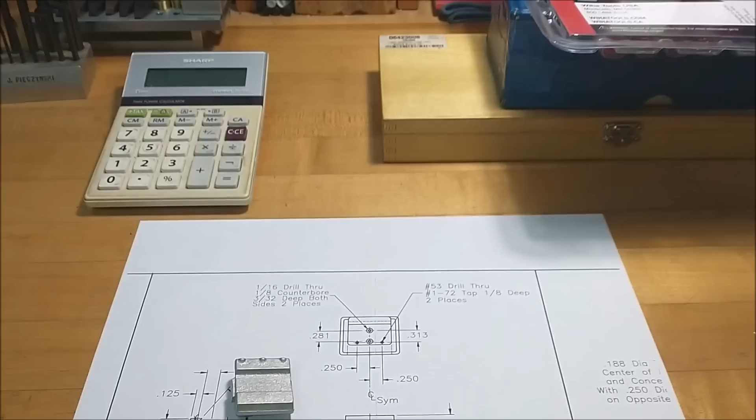After having just recently finished up the knee for the mini milling machine, I'm going to move on to the saddle casting since all my dovetail cutters and blocks and such and desire to cut dovetails is still pretty alert. Anyway, this is what the part looks like when you start.

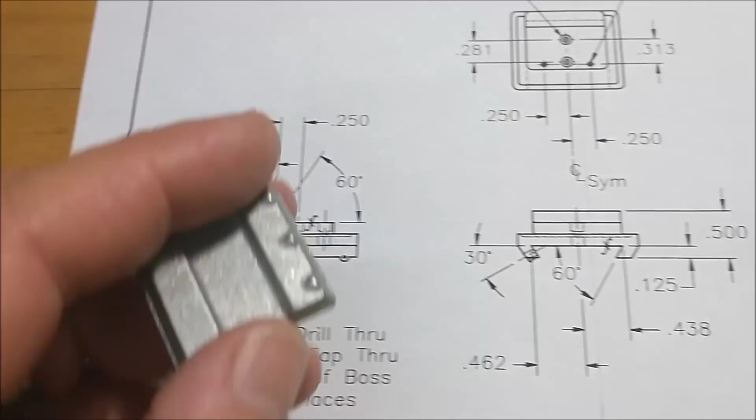A lot of similar features to the knee - basically the same type of offset dovetail for a gib, adjustment screws. On the top here, this is a two-piece dovetail. There's another piece that goes on here that will actually push and close so that you can take up the adjustment for the table itself.

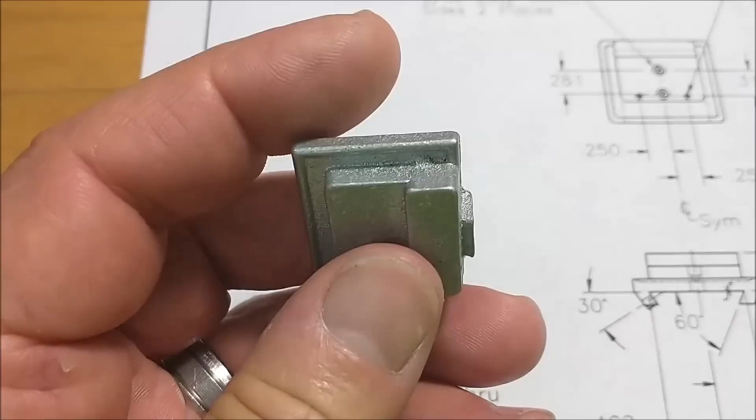Naturally, like anything else, going to start off with a file, create some flat surfaces, blast this thing, and we'll be back and I'll show you what that looks like before we get started. Let's do it.

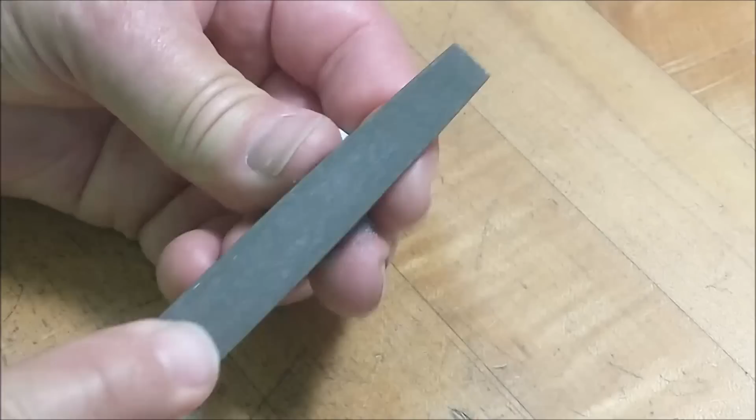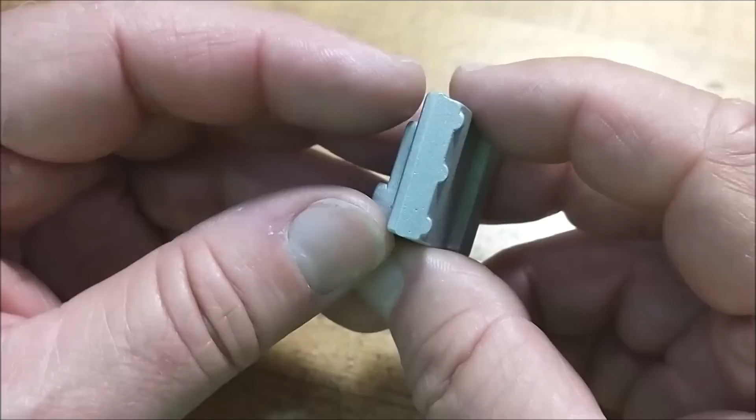After just a minute in the blaster, the freshly filed surfaces are now true to the world, and they look like the original casting. Now, when I produce this part, when I start machining this part, I'm going to use this as a primary banking area right here, and I'm going to hang it from the back jaw to establish

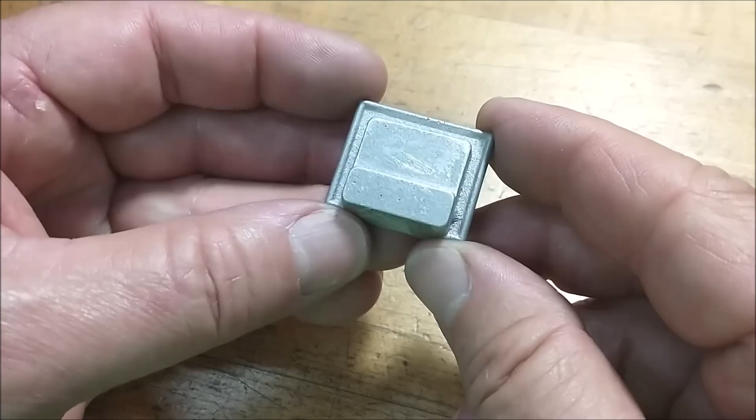May or may not be the right choice, I will find out shortly, but this is ultimately going to be all relieved away for a dovetail cut that will be right here in this corner. But I still need some place to hold it so I can do that, and that's what I'm going to establish. That's the first one.

Let's jig it up, hang it, take a couple of cuts over to the mill.

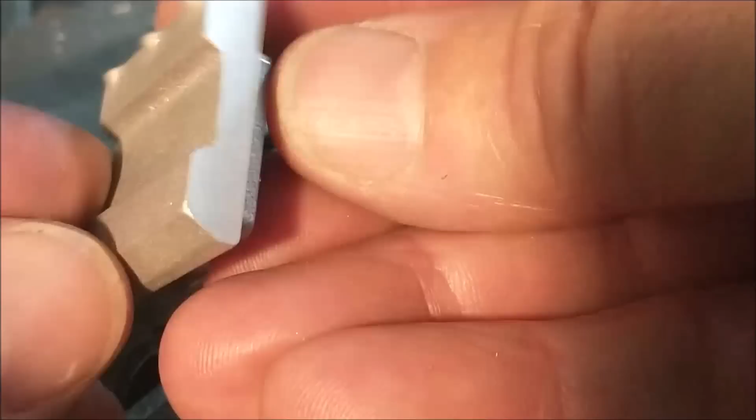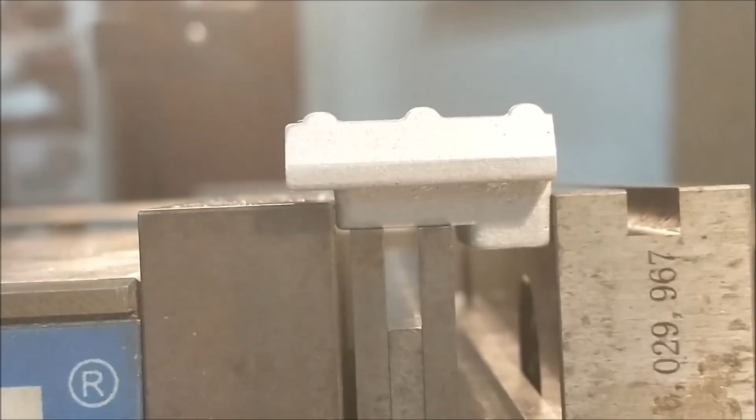By using a variety of parallels spaced at different intervals, I can bank off the surfaces that I've been using all along as datums - machine surface in the back and the contact surface underneath.

I'll be working in the y-axis to do the top dovetail features. And I will move the part over on center. That was just so that you could see the stacking of the parallels.

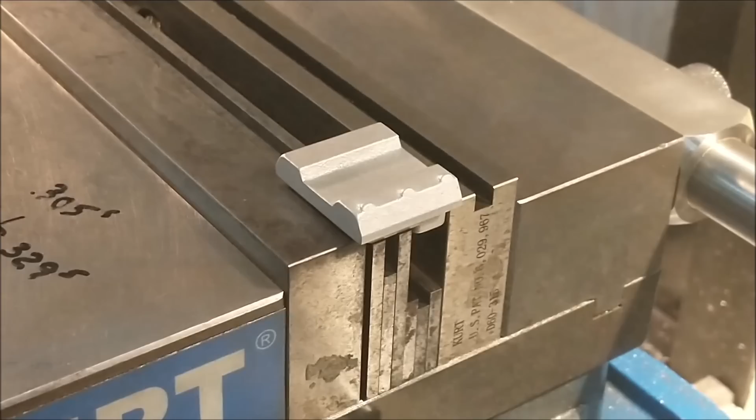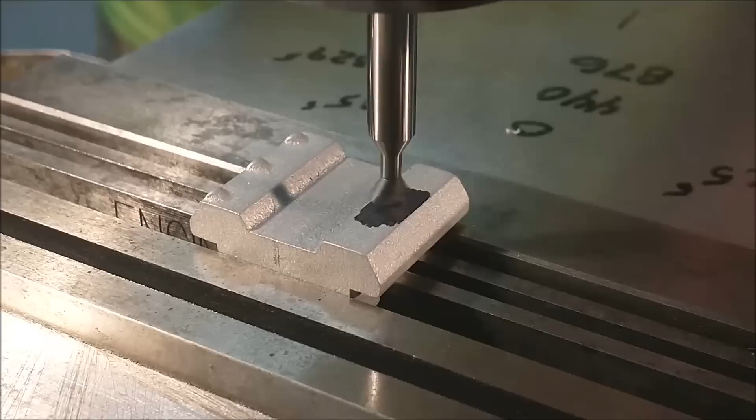If you pay attention to the black spot that I just put on there, when I bring the dovetail cutter down, you'll see an incredibly small witness mark show up on that area. And it is right there.

Now I've set the table to a specific zero, and I'm going to check my gap against this tool with a feeler gauge to make sure everything is good.

Now if you're using a feeler gauge to check a carbide tool or a cutter, make sure you make the table shift and then insert the gauge. Do not bring the cutter down onto the gauge or the pin or the block. You will chip the cutter.

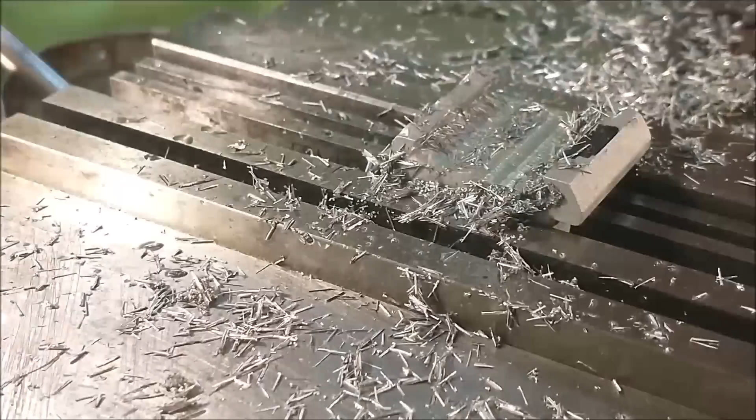Lapse time, 12 minutes for that slide. Take it out, clean it up, reposition it, drill some holes.

Be extremely careful when drilling the holes through this surface. If you have parallels underneath, the holes will probably intersect at least one of the parallels. I managed to squeak mine out. I'm going to do the holes before I move this part.

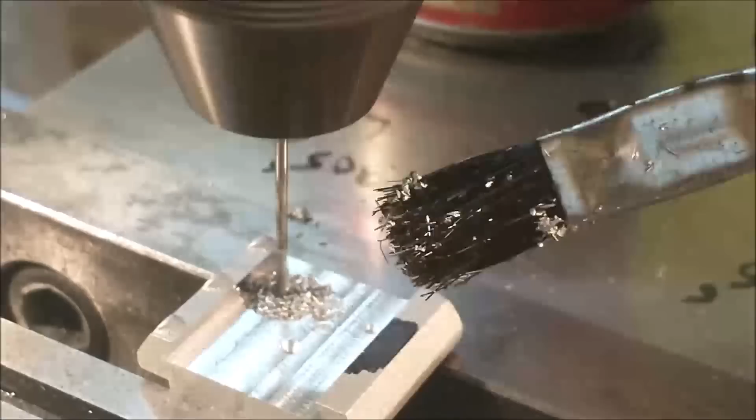I do not usually put an end mill in a drill chuck, but this is a counterbore operation. It's moving about 20 thou worth of material on either side of that hole, and I'm coming straight down with it. There's no side load, so I'm going to say it's okay in this particular situation.

I'm going to bring the quill down to a hard stop, and I'm going to bring the table up until I see material start to gather around the bottom of the cutter. That's why I didn't center drill it too large. I wanted to make sure there was area for the cutter to engage.

At that time, I will zero out my dial, get the cutter off the deck, and move the table up the depth of the desired counterbore.

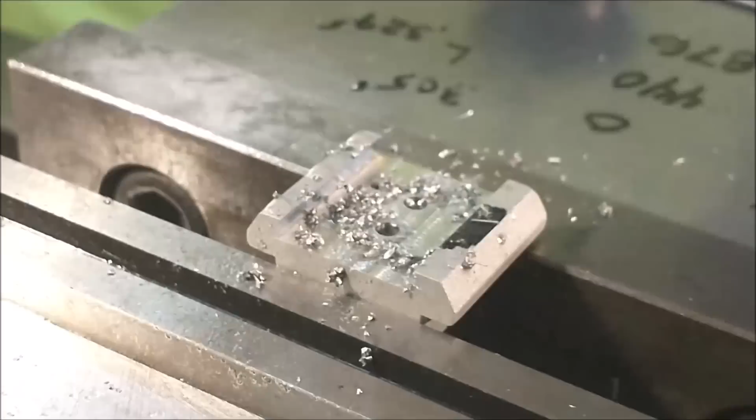Comfortably, I would say the next operation are the 3 oblique holes, very much like you saw me do on the knee.

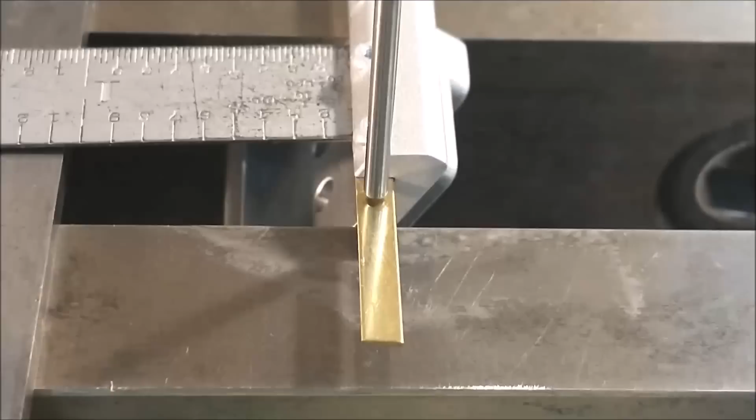Prior to drilling the 3 gib adjustment screw holes, I placed a piece of brass shim stock, the material they provide for the gib, in the dovetail slot. Using a pin and a drill chuck, I visually aligned the pin to a good contact point on the gib so it wasn't biased to the top or bottom. That was then my x-axis zero. Y-axis for the holes was completely visual.

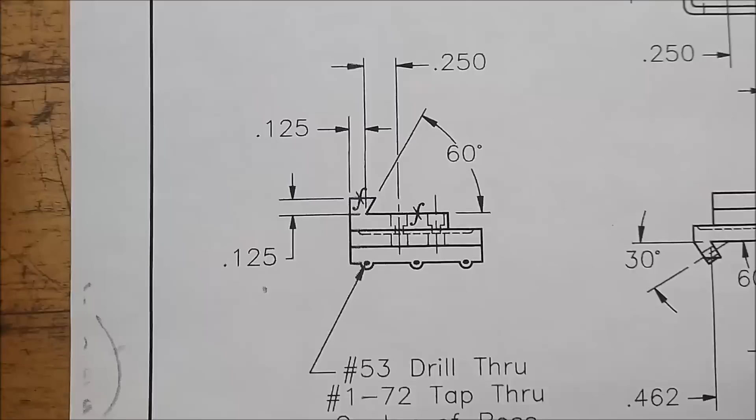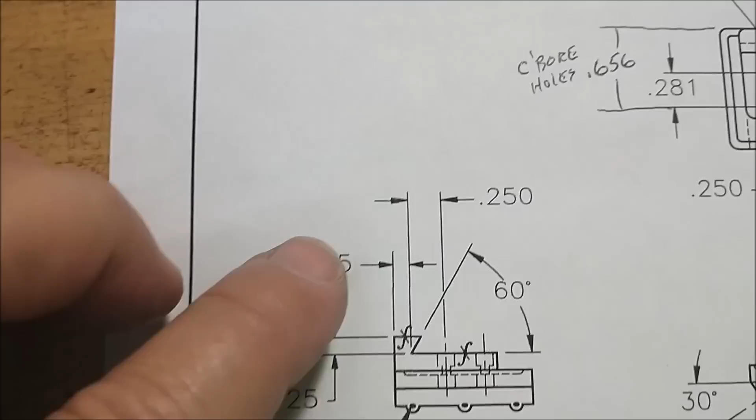The final milled feature on this little part is the top dovetail. Now, I'm not sure who designed this part or why they dimensioned a 3-place decimal to an internal sharp corner, but that's probably not the way to do it. I'm going to lay a pin in there, and I've come up with a stack dimension that I'll measure from the back of the part to the outside of the pin, and I can guarantee that with a correctly sized 60-degree tool, the 125 theoretical sharp corner they're requesting will be there.

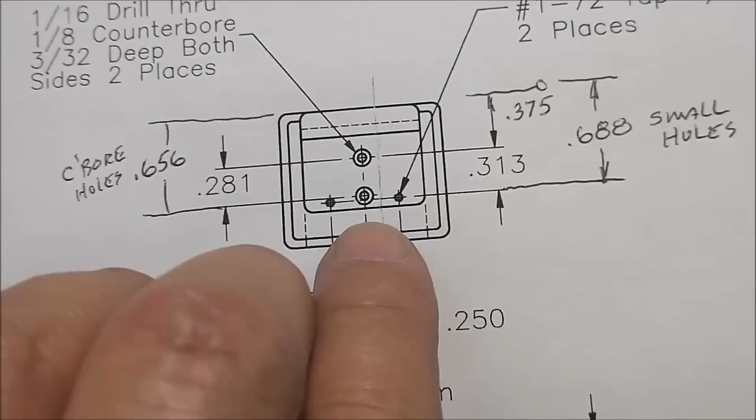I'm going to sit this on a block that rests inside the dovetail area, so I know everything is true. It'll be banked up against the jaws this way with a pinch block on the front, and this should be relatively easy and quick to cut. The holes are already in, so I'll just pick up the holes with a pin, and I'll know exactly where I'm at, and I can come back and put the counterbores and threads in the part. I'll show you the setup.

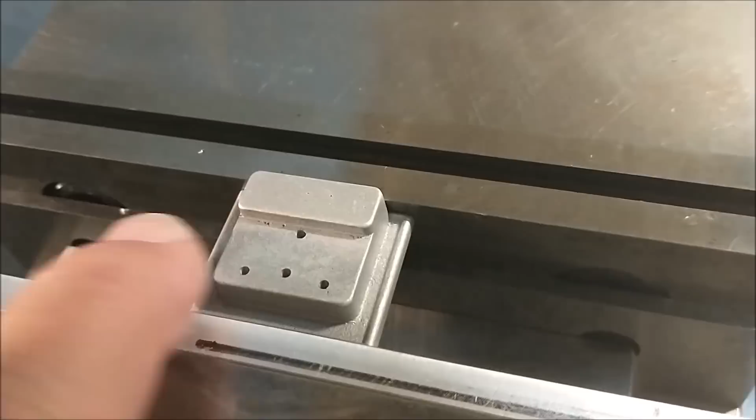Very straightforward. Support block underneath resting on a machined surface. The machined surface from the initial operations is pressed against the back stationary jaw. And I'm going to run the dovetail cutter left to right along the x-axis to put that feature in. Let's do it.

All the redundant steps were edited out for time compression.

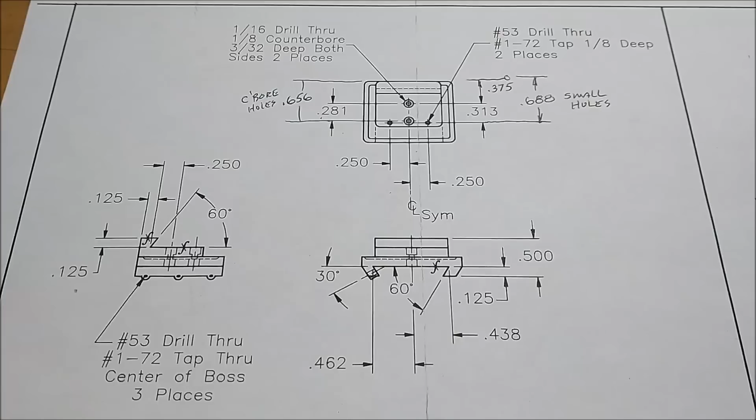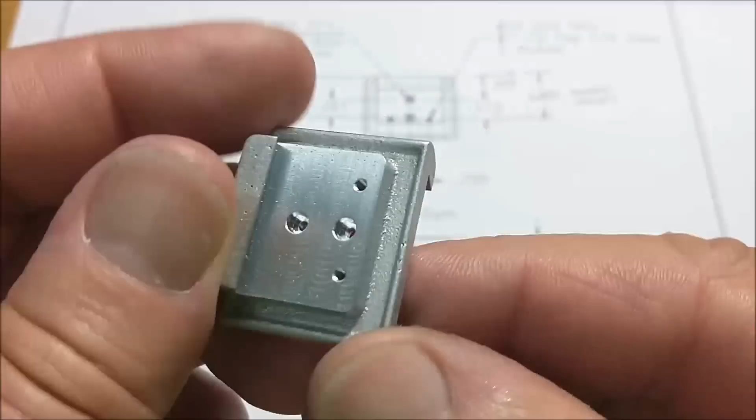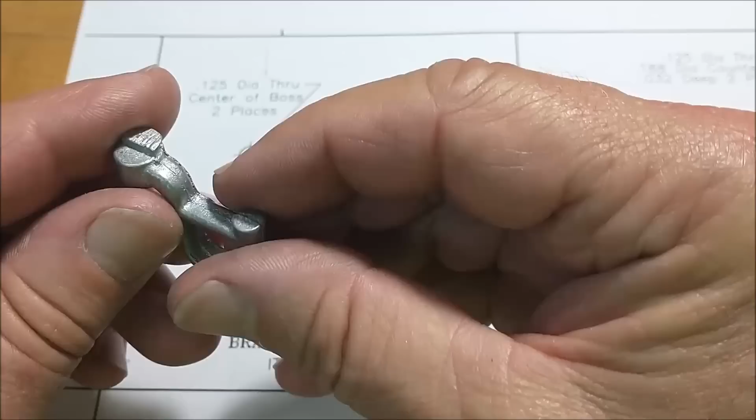I think I'm going to take a break from the dovetails for a couple minutes and do the little bracket casting. This guy shouldn't pose too much of a problem, but there's a rather aggressive mismatch in the casting right here. You can see the thickness of this side versus the thickness of that side. Boy, they missed the ball on that one.

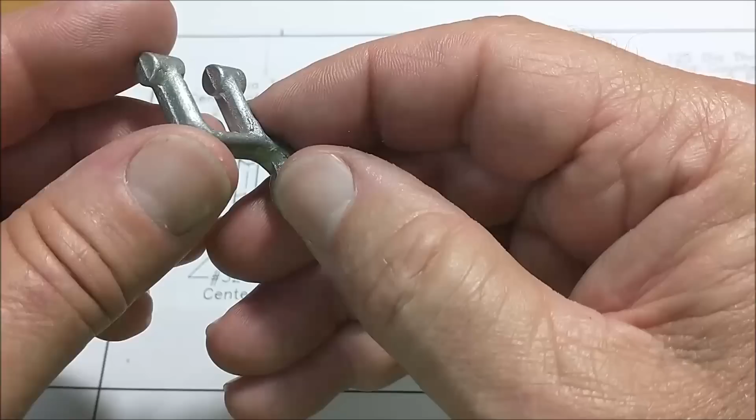Not too bad. It's going to take some filing time. I did some preliminary measurements, and it's the same gauge all the way across, all the way around, so that's good. That gives me a flat clamping option this way, and I can side mill everything and do all these dimensions basically at one shot, then stand it up to drill it. Well, that's the plan. Let's grab a file, some patience, and a cup of coffee, and figure out how we're going to make this thing go away.

I have a feeling it's going to be a corner round tool in the mill right there. That's an awful lot of meat to try to file off and make it look pretty. Give it a shot.

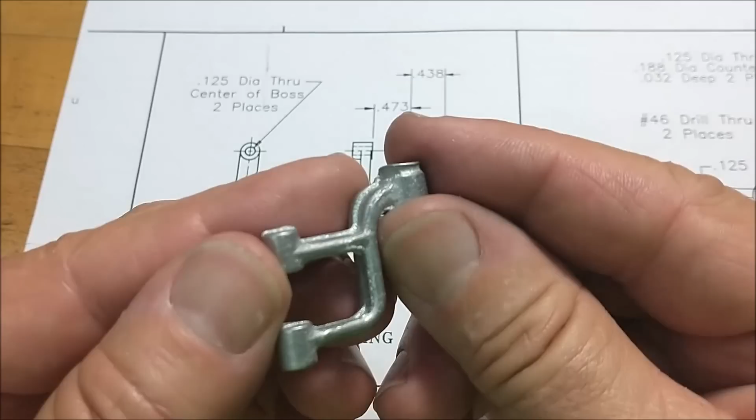The combination of a Sharpie marker, or any type of marker, and a file, I think, is a fantastic aid in visualizing what you're trying to accomplish. The Sharpie marker usually fills in the voids, and the file will instantly show you where those voids are when you start cutting away the black. It works incredibly well. If you haven't tried it, give it a shot.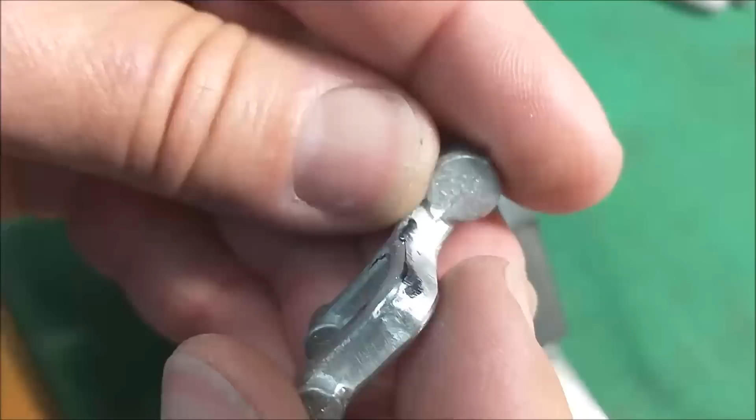Man, that is ugly. Woof. All right, well, more filing. Not going to bore you with it. I'll bring it back and show you when I'm done.

Actually, I'm going to put this back in the machine, and I'm going to mill off this inside. I'll show you that operation. But the rest of the filing, seen it once, seen it a dozen times, right? Just going to round these corners off, blast it. I'll be back. Well, the mismatch on this little piece is just a little too aggressive on the back side of this area right here.

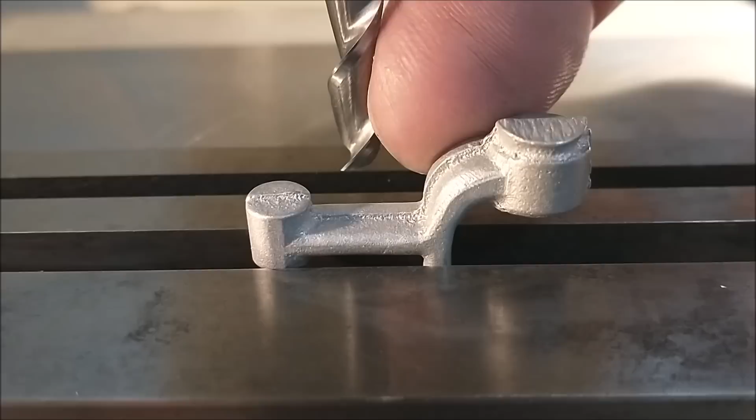It's going to take forever and a day to knock that off of there, so I'm going to do it in the mill. I'm going to mill that out and just rotate the piece a bunch of times to knock this down, then file it in to match, of course.

The arm itself, this little section right here, is just visually positioned parallel with the table. If you look through it from the back, I can't get the camera down there low enough to show you the gap, but it's just a very small parallel gap right there under the casting. All right, so let's put some marker on there and have at it.

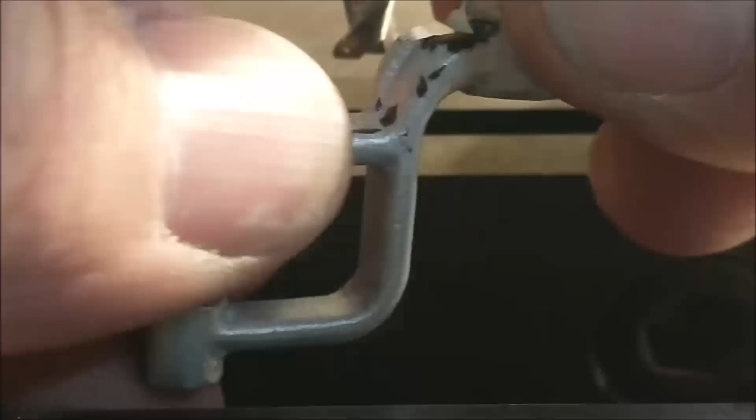Since the nose of the part is wider than the body of the part, spacer blocks are required to rotate the part. Each one of these cuts, I'm trying to form a flat on this part that projects about the same distance into the radius on the far side.

This is all visual right now, and the length of that cut is the determining factor. I could probably go deeper if I wanted a smaller radius on each side, but I'm going to try to keep the big radius on the thicker features so that it looks more authentic.

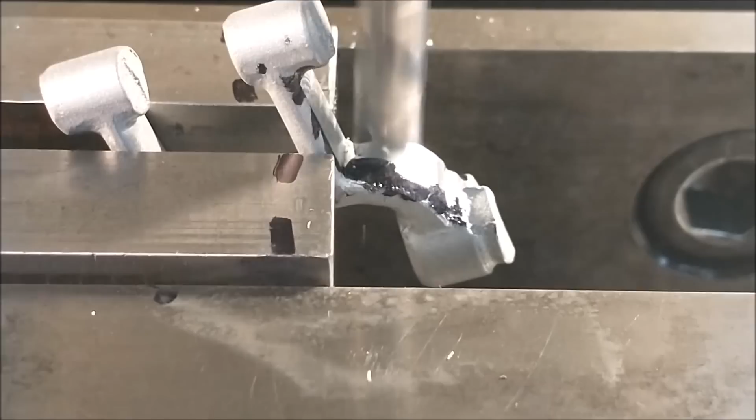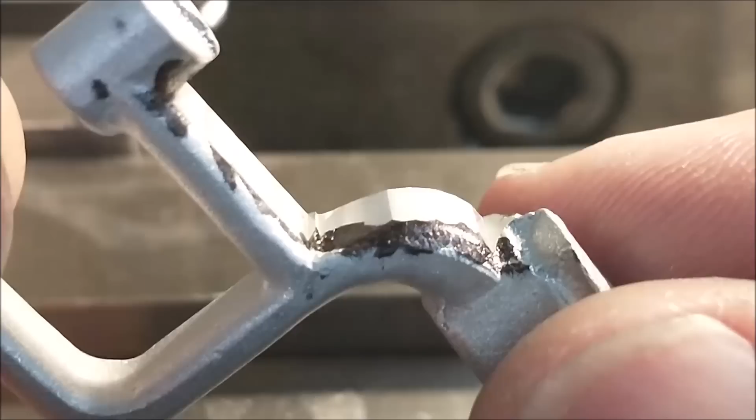All right, sometimes you got to know when to say when, and I think I'm saying it right now. Got some file work to do to knock the corner out, remove the facets, blend all the rounds, and make this top look round again as well.

Kind of work that's good for a Saturday morning with a cup of coffee. Back to the bench, show you when it's done.

After some bench work and some blasting, the parting lines are satisfactorily removed. The ones that will be machined off are still present.

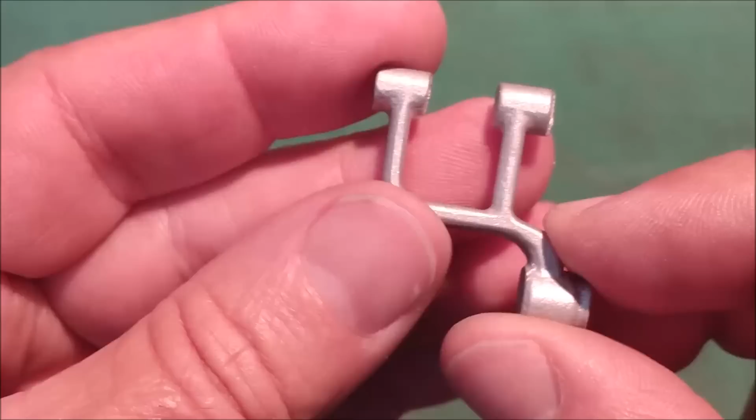On the print, the dimension between these two arms is about the diameter of this pin. Well, it is the diameter of this pin. So you can see that is relatively close to the inside of each one of those arms. That's about the only critical thing you're going to have to watch out for.

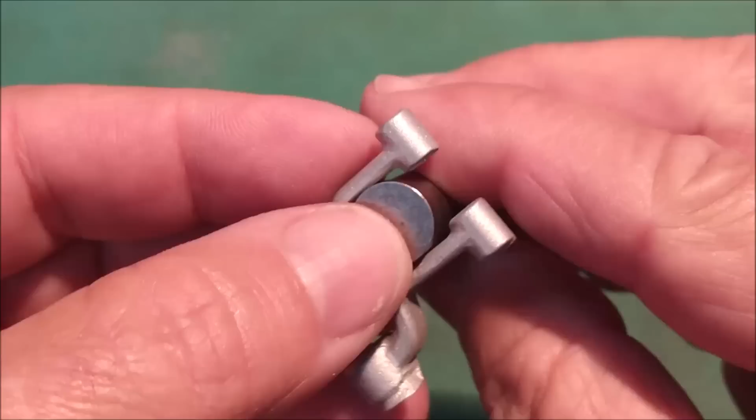You're going to end up with a notch on the inside of this. And the following dimension from there would be the inside of this to the top of this. And then the thickness. So if the thickness falls in to hit this arm right here, make sure you use an end mill that's large enough to keep that radius and possibly file and blend it out after the fact as well.

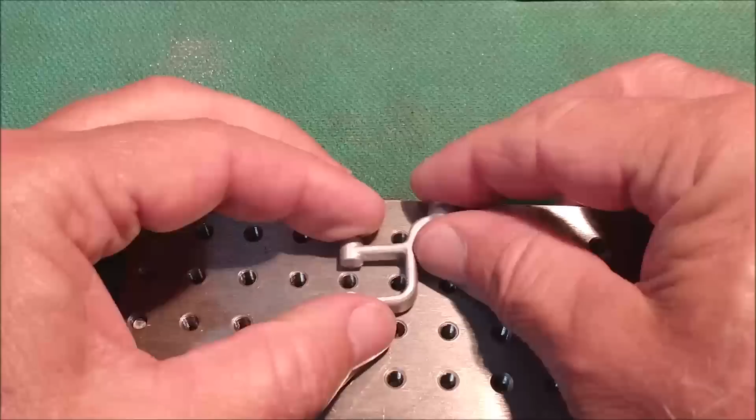I'm going to do this in a relatively unique, easy setup. I'm going to hold it this way on my fixture plate. I'm going to clamp it down up on a riser block.

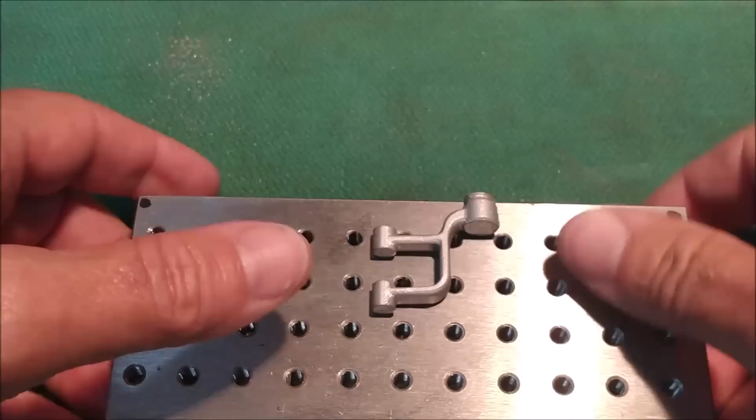As I was forming this, as I was filing this, I maintained parallelism right there, so it's safe to clamp on a little riser plate this way. I will side mill all the gaps, and then I will just simply flip the plate up.

And I will drill the holes, so no messing around. The holes will be as perpendicular to the flat surfaces as the fixture is to the machine. Should not be a big deal.

Give me a chance to set this up in the mill. This will be in the vise. I will use a 1-2-3 block against the back stationary jaw to establish the rotational positioning of this part.

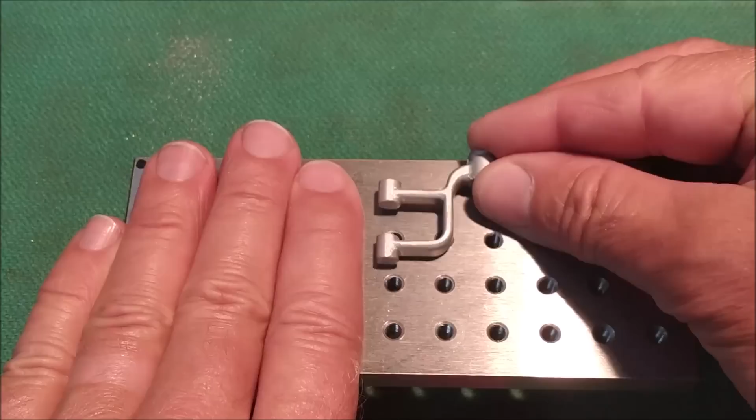Then I will clamp it down. Then I'll mill it. Okay, that's how it's going to be. Let's do it. Before we start cutting, let's take a look at the setup.

I've put an edge finder against this surface right here. Knowing these diameters, I know now where the center of those journals is, so I can rotate the part straight up and not have to change anything. Finding all the dimensions should be relatively easy.

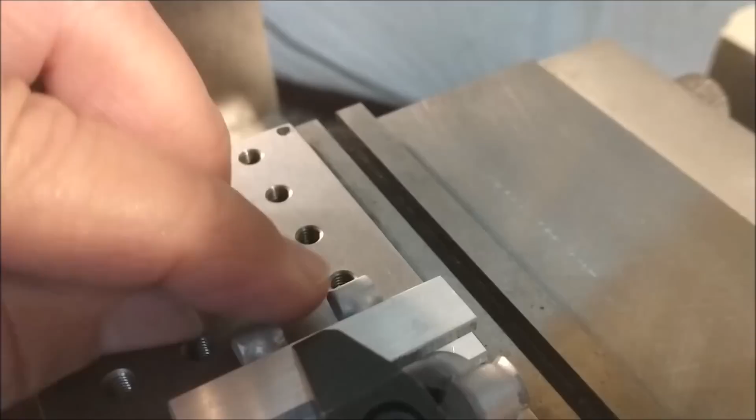Once I establish the inside dimension here, I will offset the cutter back the diameter of the cutter and then simply make the dimensional move to hit the back surface relatively easy.

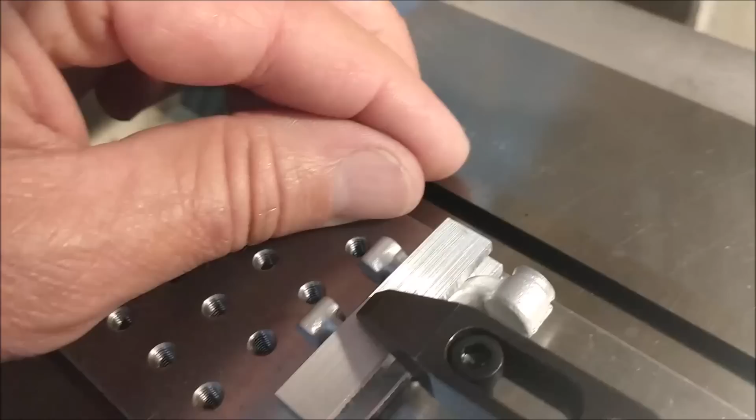Once this surface is established, that'll be a zero surface. I'm going to move the cutter 125, the diameter, which puts the edge of this surface on the edge of the cutter. When it shifts, it's a true shift. To establish this height would be relatively hard to check, so let the digital or the dial tell you where it's at. Now let's put a cutter in here, clean these things up, flip it, and drill some holes.

Prior to starting this cut, I put a very small gauge pin in my drill chuck and danced this part back and forth on the Y-axis until the pin made contact with the inside of the casting. I zeroed both sides, found the center line, and set my zero there. I double-checked the setup as I was cutting with a mirror because I couldn't get my face or eyes in there with the camera positioned where it was. Go to a bigger mirror if you have to — do what you've got to do to make sure it comes out the way you want it.

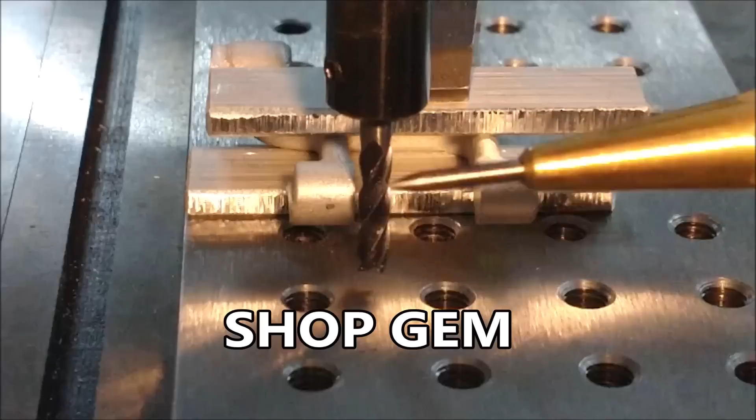The cutter position is currently sitting at the location that formed the inside finished surface right there. I know the cutter diameter is 124, so I'm going to shift the cutter 124 that way and zero out the Y digital.

Now we have this side of the cutter true to the inside of the part. The next feature to be cut is dimensioned from the inside of this opening to the back side of this opening, or this boss back here. You can see how that would be a little bit difficult to actually measure. So by having the cutter aligned right here, it's a straight-up table shift to the required dimension. Then when the cut is made, you can trust the digital to have delivered the feature you're looking for.

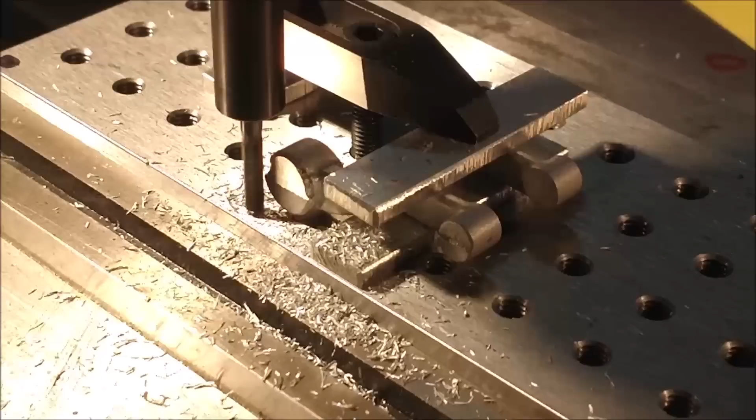With the digital currently sitting at the finished location for the outside step I just did, I'm going to do exactly the same thing I did to get here. I'm going to zero out the Y-axis digital, then move the table the thickness of the cutter, 124, and zero it out once again. Now all I need to do is a true shift of the table to get to the thickness of the boss, and I'm there. If you can't get a measuring instrument in there, trusting your dials or digitals is the way to go. Let's do it.

With all the milling complete, and having taken the time to find the part and measure it prior to making this setup, flipping to a vertical format to drill the holes should be relatively quick.

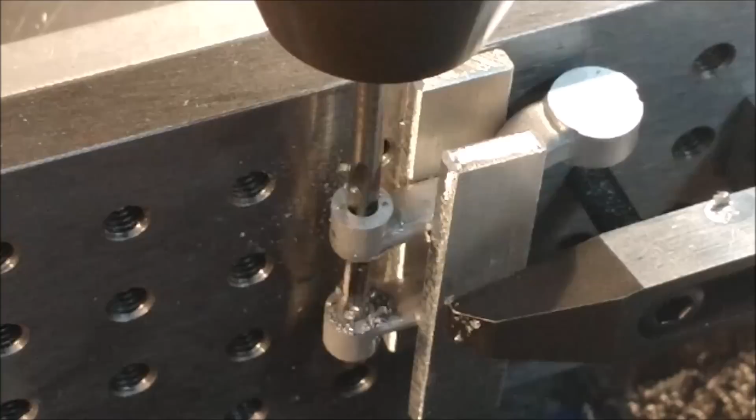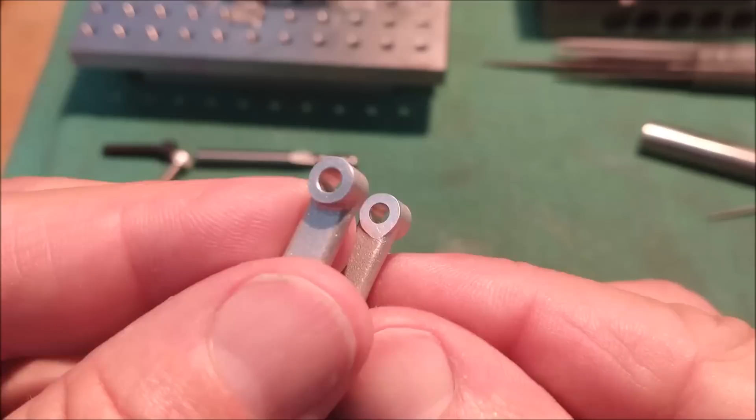I am quite pleased with the way this came out. All the casting marks and mismatches came out. I could have used a little bigger cutter in this corner right here — you can see if I matched that radius, it would be a little cleaner. But then again, I'd probably have to blast it again, which would mean masking it again, and I didn't feel like doing that.

So a gentle wipe with some Scotch-Brite on all the machined surfaces, and broke the edges with a file. The 125 bore goes through there — this is a 125 center drill. The pulley that fits in here has set screws to secure it, so it traps the shaft that goes in there. The ends aren't called out as machined on the print, but I cleaned them up because they were mismatched, and I think it looks a lot better this way.

The casting defect on the end — well, there are some things you've got to live with. I could probably file that out and fake it in. I may actually have to do that, because that little nick right there is going to bother me for all eternity.

Anyway, there you go — get out of it what you put into it, right? Satisfaction guaranteed. Thank you very much for tuning in for these two parts. There was an awful lot of work in both of them. And as simple as it looks, never underestimate the complexity of a part just because it looks simple. Take your time, do it right, do it once, move on.